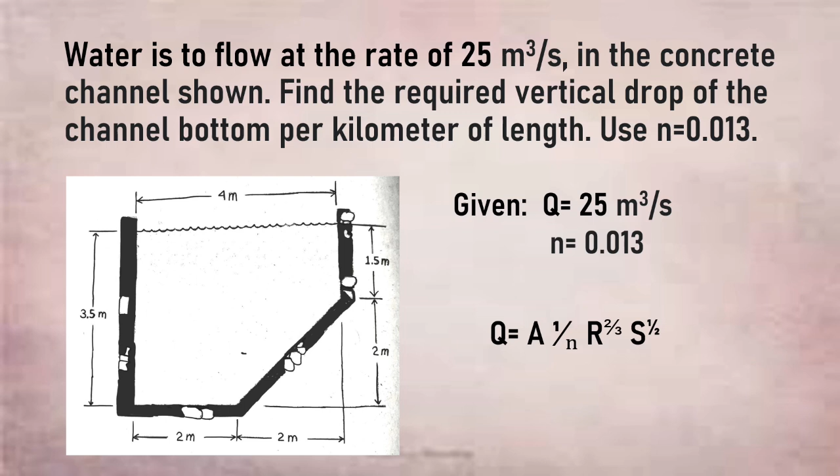In this problem, in order to get the vertical drop of the channel or the slope of the channel, we can use the Manning's equation. Since the given values include the flow rate or the Q and the roughness coefficient or the n, we can use the equation Q equals A times 1 over n times R raised to 2/3 times S raised to 1/2.

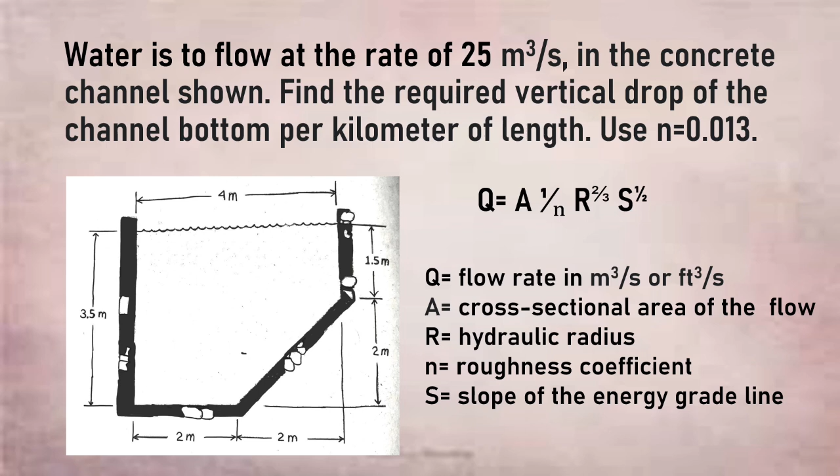Where Q is the flow rate in cubic meter per second or cubic feet per second, A is the cross-sectional area of the flow, R is the hydraulic radius, n is the roughness coefficient, and S is the slope of the energy grade line. Since we still don't have a value for the area and the hydraulic radius or the letter R, we are going to solve them first.

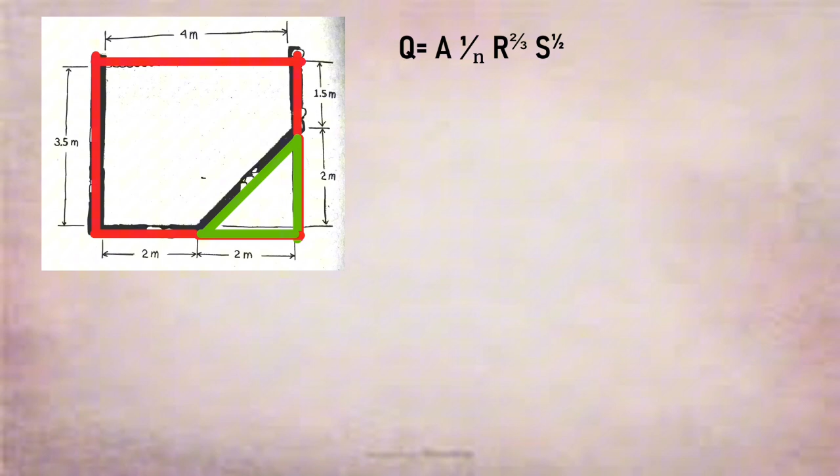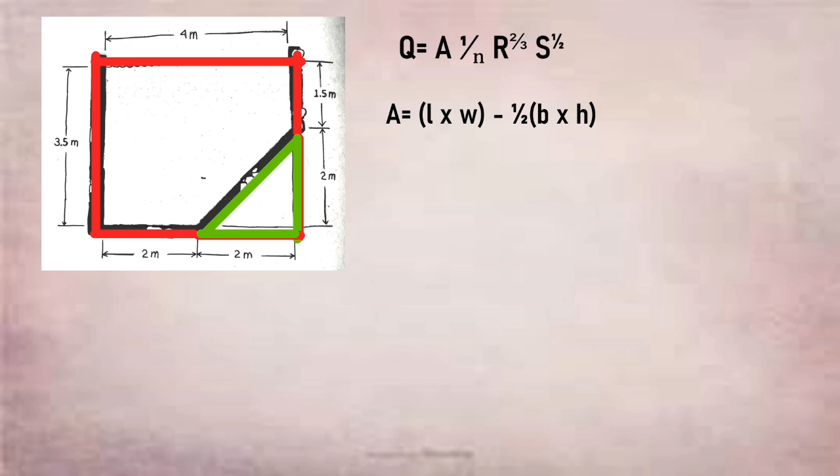So the area is equal to the area of the rectangle, length times width, minus the area of the triangle, 1/2 times base times height. If you wonder how we get this equation, let me show you. As we can see in the figure, we assume that there is a rectangle and triangle shape. Since walang fixed formula for this shape or fixed formula na pwedeng gamitin to solve the area of this certain channel, we will just make an equation to get the area.

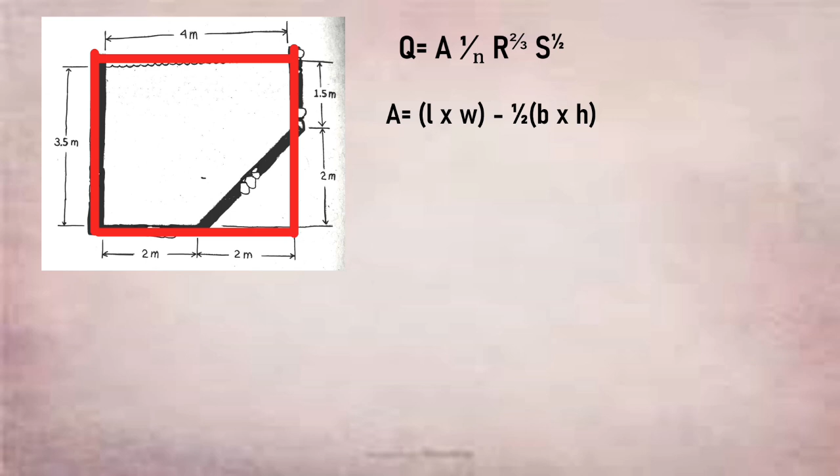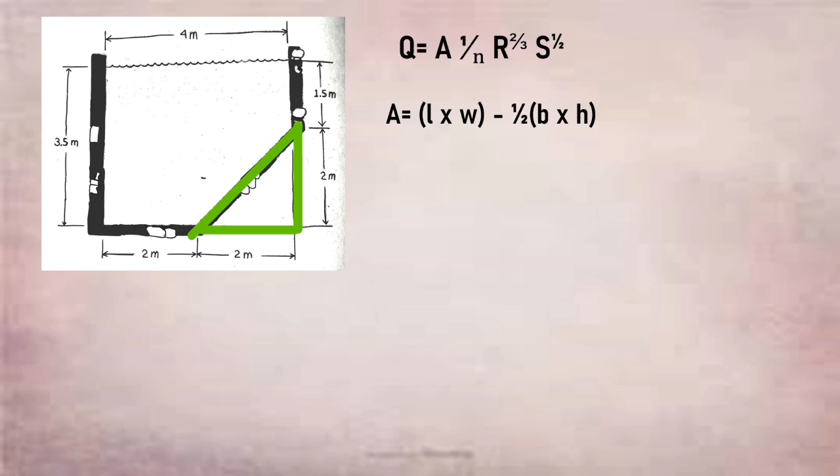First, let's say that this channel is a rectangular channel, so we have a formula of length times width. Then let's subtract this part, which is the triangle part, since hindi naman siya kasali sa area ng channel. So minus the area of the triangle, which is 1/2 times base times height. Then let's substitute the values.

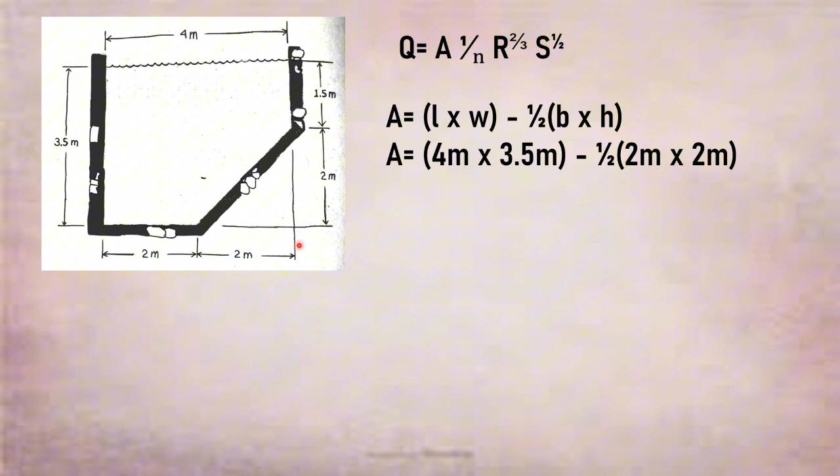Length of the rectangle, which is 4 meter, and width, which is 3.5 meter, minus the area of the triangle, 1/2 times the base of the triangle, which is 2 meter, and the height, which is 2 meter. Then we will have 14 square meter minus 2 square meter. After ma-minus, we will get an answer of 12 square meter.

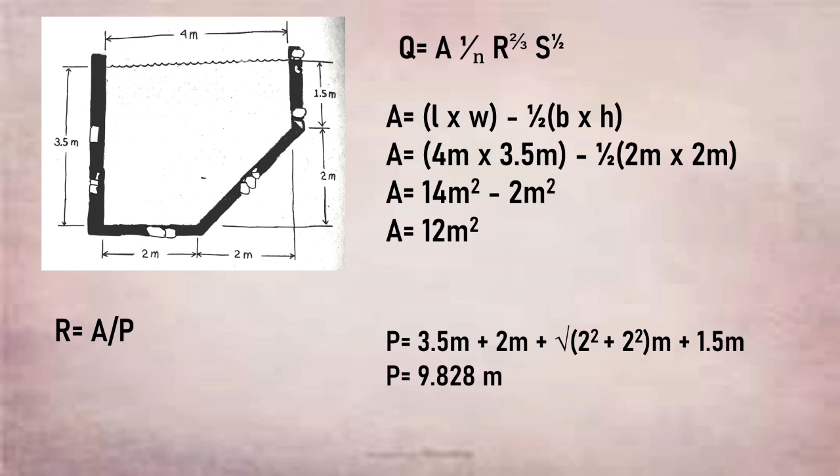Next unknown value is the R, which has a formula of A over P, or area over perimeter. Since we don't have a value for perimeter, we need to solve it as well. So to get the perimeter of the channel, let's just add all the sides. So 3.5 meter plus 2 meter plus this side, which is the square root of 2 squared plus 2 squared, and 1.5 meter.

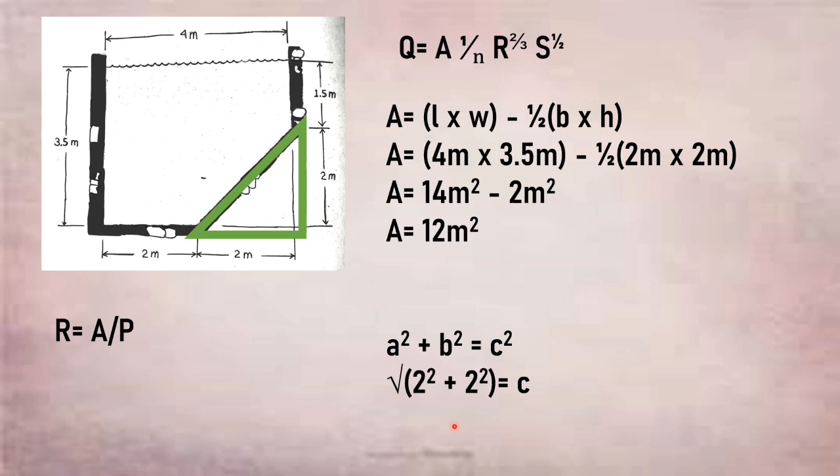So if you wonder how we get the square root of 2 squared plus 2 squared, it is from the formula of how to get the sides of the triangle. A squared plus B squared equals C squared. Since the two sides of the triangle are given, which have a value of 2 meter and 2 meter, we can now get the value of C. So going back to this equation, after ma-add natin itong lahat na value, we'll get an answer of 9.828 meter.

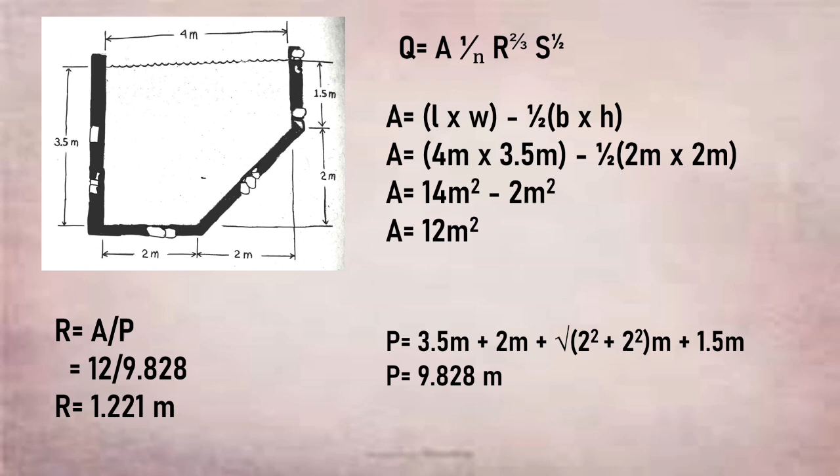Tapos, let's substitute the values. A, which is 12 square meter, over 9.828, which is the perimeter. So we will get an answer of 1.221 meter. So, meron na tayong value ng A and R.

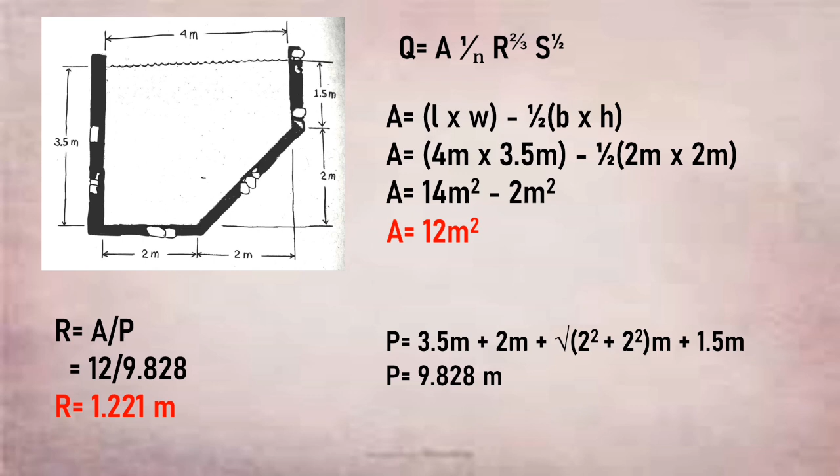Next, since may value na tayo ng Q, A, n, and R, we can now get the value for S. So, to get the S, let's just substitute the values. So, 25 cubic meter per second is equal to 12 meter times 1 over 0.013 times 1.221 meter raised to 2/3 times S raised to 1/2.

So, to solve for the S, pwede lang natin siyang i-shift solve. So, we will get an answer of 0.000562 or 0.562 meter per kilometer length. And that is the final answer.